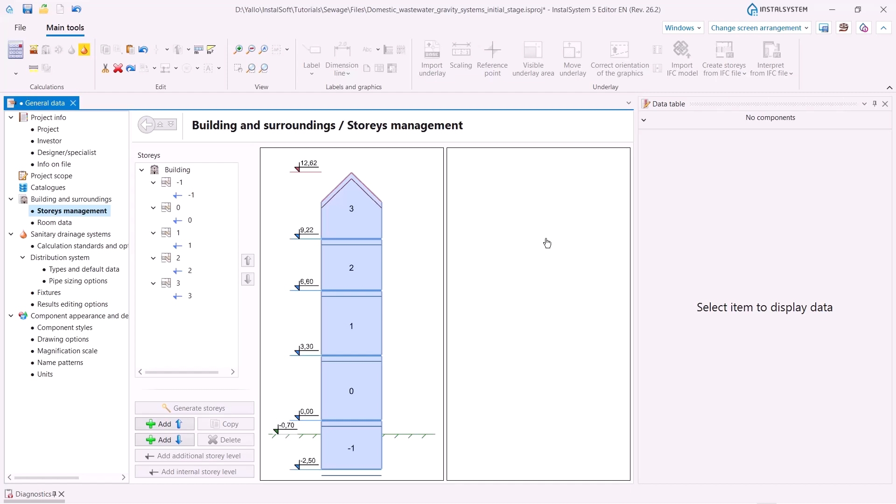First of all, I would like to say that here we have several new features related to building construction. We have the opportunity to create new, additional, and internal story levels. These elements allow us to design installations in complex buildings without any problems and with a high degree of automation.

This has a direct impact on the internal sewage installations because they are laid with a certain gradient in relation to each other and to the floor level, and the creation of additional and internal story levels with their specified elevation allows us to automatically determine the gradient of the pipe runs laid on these levels.

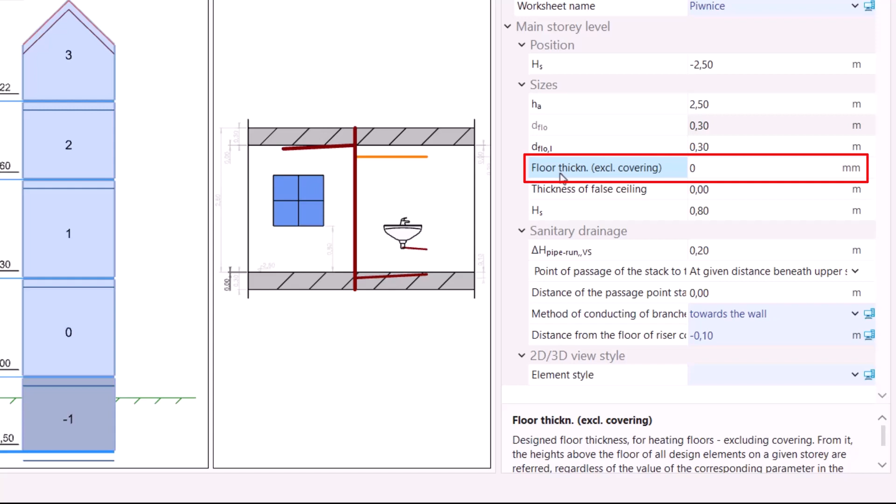Another parameter that has a direct influence on the installation and is often ignored is the floor thickness. This is the thickness of the heating floors. This characteristic is also important for the internal sewage installation and affects the gradient of the pipe runs. So please pay attention to this characteristic.

Now, a very important novelty which recently appeared in our program: the point of passage of the stack to the collector. This is the place of connection of stacks to the sewage network. Unfortunately, this characteristic is often missed by our users, and as a result causes problems with automatic sewage network routing. So don't forget about this. Please pay attention to this value.

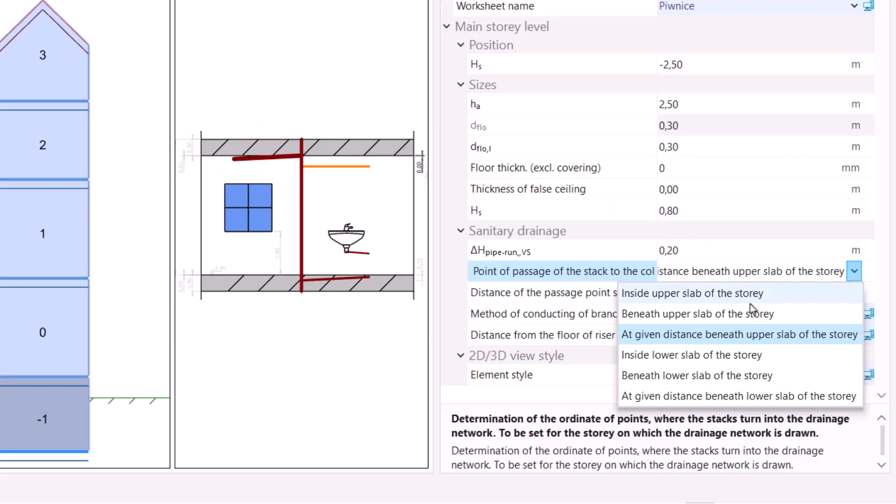Here we have several options to choose from. By default, we have it set at a given distance beneath the upper slab of the story. Please pay attention here. Let's change it to a given distance beneath the lower slab of the story. Now you see how the situation here has changed.

We will also change this value, the distance of the passage point of the stack to the collector. Let it be 0.4, and you see how it has changed.

Once again, I would like to point out that this is one of the critical parameters which has an important impact on the sewage installation in general. So please pay close attention and control it.

Another parameter you should pay attention to is the method of conducting branches. Here we have two options: towards the floor or towards the wall. Today we will try both of them and see what impact this characteristic has on the internal sewage installation.

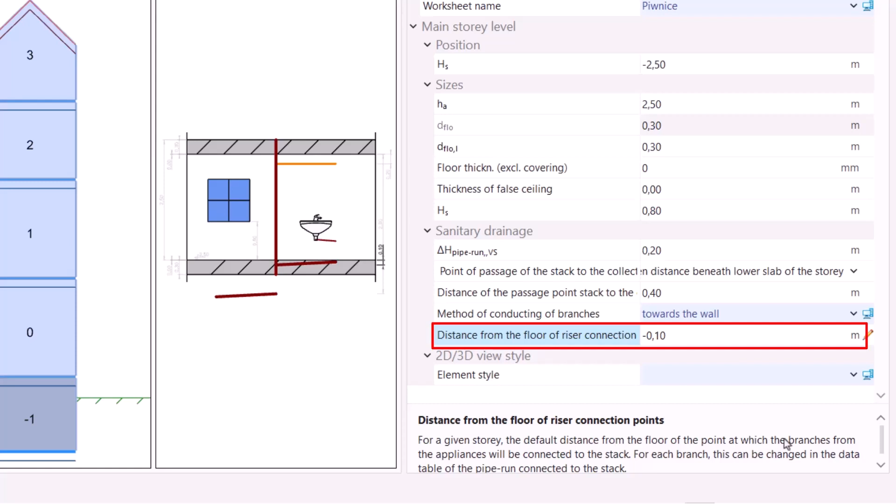One more important parameter we will pay attention to is the distance from the floor to the riser connection point. For a given story, this is the default distance from the floor of the point at which branches from the appliances will be connected to the stack.

Let's change it to 0, and you see how the situation has changed here. In this case, the pipe will be laid with a gradient so that at this point the elevation of the connection will be 0. Please also pay attention that calculations in our program are carried out in relation to the axis of the pipe, so this also has an impact on the layout of the sewage system.

Please note that one of the novelties in our program is that in the label of the element, in the label of the pipe, we have the ability to show data in relation to the axis of the pipe runs, and also in relation to the bottom, taking into account the diameter.

We are moving on to calculations, standards, and options. Here we have two standards to choose from. You know that the program responds differently to diagnostics depending on the chosen standard. There are different settings and restrictions on pipe length, diameters, and so on. Differences in the project standards affect the way systems are filled, ventilation methods, riser connections, and so on. So you can choose between these two.

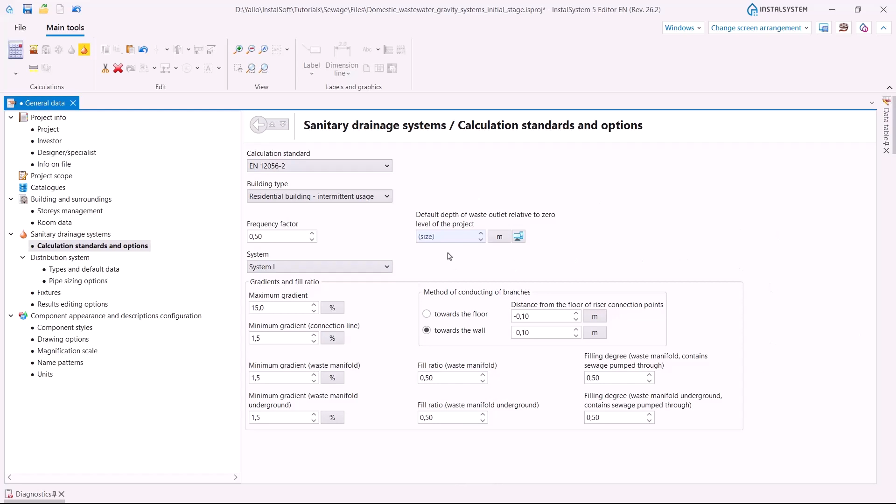Building type, frequency factor, system, and here are general data that apply within the design practice. You can see these values which the program provides by default. You can change them in case of necessity.

Going further, types and default data. Here we can choose the type of pipe for branch, common waste branch, stack, waste collector, underground. We can choose from the offered list default methods of implementation of connection. Default types are the components.

Next, pipe sizing options: you can specify the type of pipe family, and also choose the range of diameters which will be used in the project. Also please pay attention that we can control these parameters: resize diameters, retain user-specified diameters, skip pipe sizing, size pipe fittings, drain ventilation pipe sizing method, and diameters used according to standards or real values.

And fixtures. Here we can specify the default type of fixtures used. Also please pay attention, one more novelty is that we can choose a default frame for the fixtures and use it in our project. Default connection systems. And I think that's all with general data.

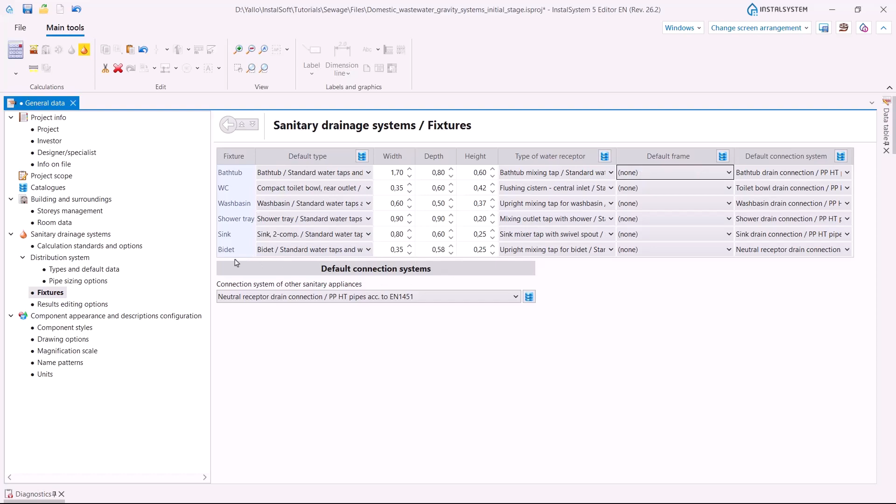And we are back to our working space. Here I have opened two working windows, 2D editor and 3D view. From my point of view, this is a very convenient combination, but you should remember that you can always change the screen arrangement and save it so that it will be suitable for you. Please also note that we have one more novelty: the ability to change story levels visibility. I will show how it works.

Here it is, and if we open the drainage tab, we will see such a picture. As we don't have a drainage system for a while, we see such visible story levels.

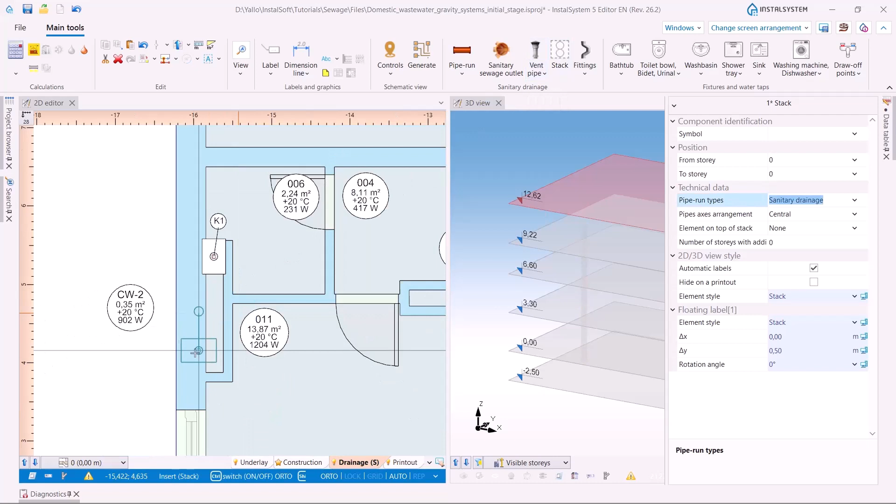We will start from the stack element. Here it is, let's place it here. Turn it. And in the data table, we will indicate its symbol K1, its position from story -1 to story 2, pipe run type sanitary drainage. Let's place another one, also we will turn it. And here in the data table, we will indicate symbol K1A, position from story 2 to story 3, change pipe run type to ventilation, and the element on the top of the vent stack will be a ventilation pipe.

Let's move to another worksheet, to story 2, and for the K1 stack we will change the element on the top of the stack, connect it to another ventilation stack, and indicate it here as K1A. And now you can see that the program has automatically created this pipe to connect the two stacks.

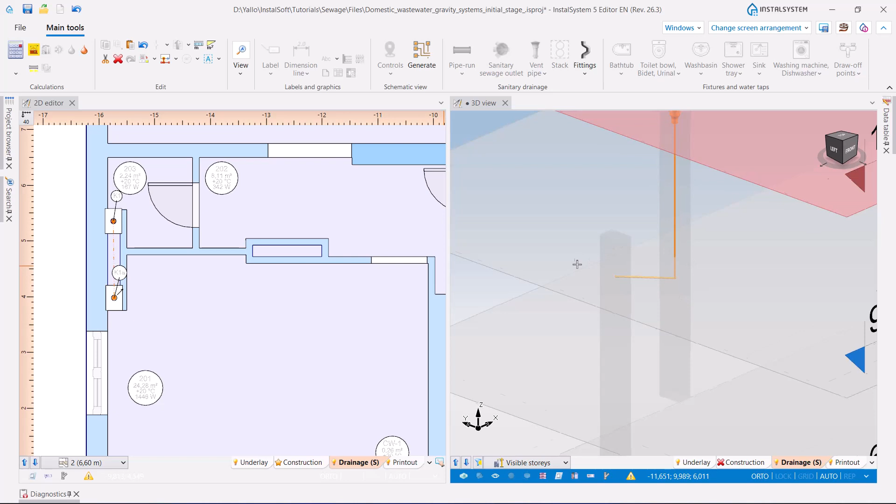This is also one of the novelties in our program. Previously, we had to draw this pipe run manually. Now the program can make it automatically.

And in our project, we will have several variants of the stacks. Let's place one of them here, K2, from story -1 to story 3. The element on the top of the stack will be a ventilation pipe.

The next one will be K3. Let's indicate it in the data table, from story -1 to 3. And this one will also have a ventilation pipe on its top.

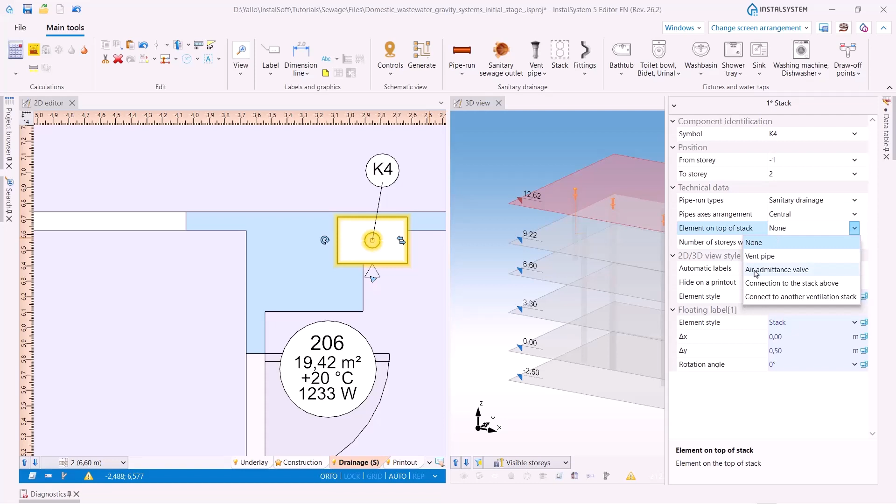And the last one we will place here. And it will be K4, to story 2, and this one will have an admittance valve on its top.

So we can observe already some created elements here on the 3D view. You can see shadows of the stacks, ventilation pipes, and also the admittance valve and part of the ventilation pipe run.

So we have three types of stacks here. The first one is the pair of stacks: one is a sanitary drainage stack, another is a ventilation stack, and the element on the top of the stack is a ventilation pipe. This is the stack with deviation, here it is, you can see. Next, two stacks - these are sanitary drainage stacks with a ventilation pipe on the top. And the last type, the last stack here, is a sanitary drainage stack with an element on top, an air admittance valve.

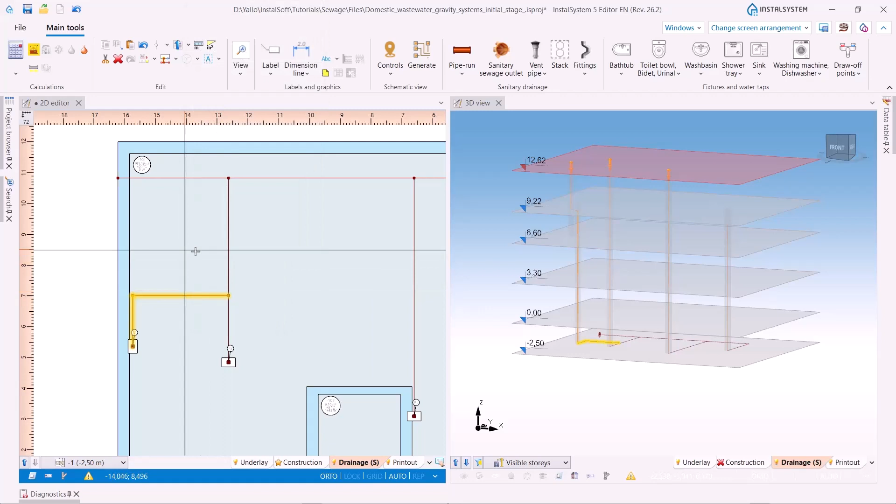And now we will go to the basement and create here the network for our installation. We will place the sanitary sewage outlet on our drawing and we will draw the network using gravity sewage pipe runs, this way, and please pay attention that we will connect our pipe runs squarely - this stack and the next one, and finally the last one. Here it is. So this is our network.

This is the 3D view. Here we have our pipe runs and the installation at this stage.

So we already have created the network on the basement. We already have stacks. And now we will place fixtures. You know that generally the sewage installation is designed in the last turn, after the water supply installation has already been designed, and therefore in most cases we already have fixtures placed on the drawing. But now I would like to show you the complete process of creating a sanitary sewage installation in InstalSystem 5, and that is why I will show you how to place fixtures right now.

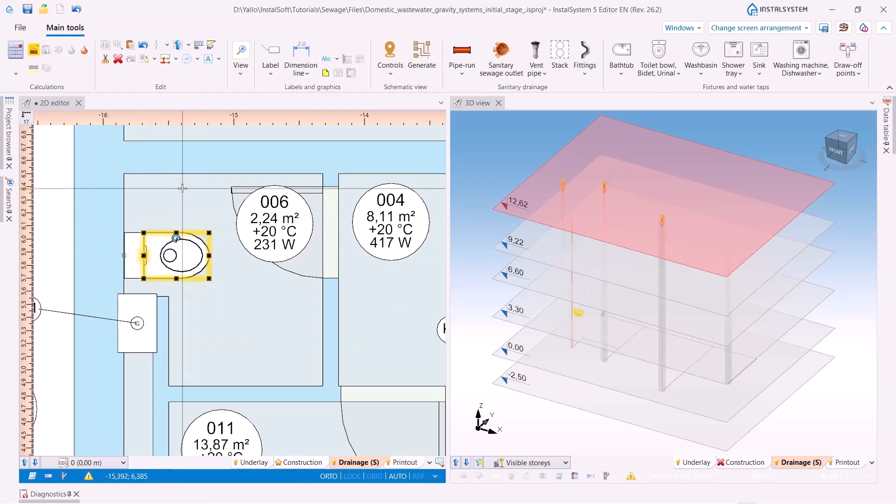The icons related to this process are located here. Let's choose toilet bowl and place it on our drawing here. And let's place also a wash basin, here it is. And now please pay attention to one more novelty which can be very useful, here it is - copy with the base point.

Let's choose the components and indicate a base point, for example, this one.

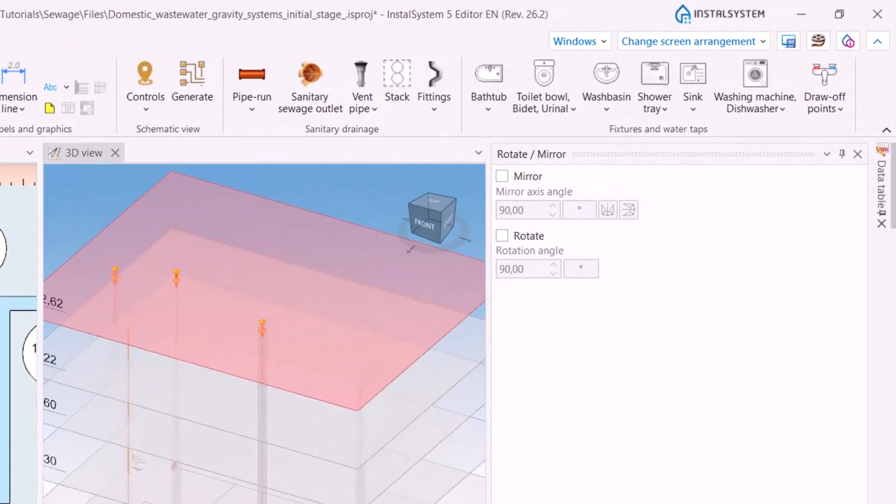Now when we place objects on the drawing, you see that we already have a base point. Also please pay attention that now we provide the opportunity to make a mirror copy and set the mirror axis angle here, and to rotate the objects with the appropriate rotation angle.

So we paste copied objects. Let's improve the position of this wash basin. This function is very useful, it can speed up the process. Instead of inserting fixtures one by one, you can just copy several of them, indicate one base point, and insert fixtures in necessary places.

And we can already observe placed fixtures here on 3D. That's what we can see now on 3D view.

Let's continue, so let's move to the kitchen. It is here, we will place a sink. Please note that we can always change the type of any element here in the table. Let's choose this one.

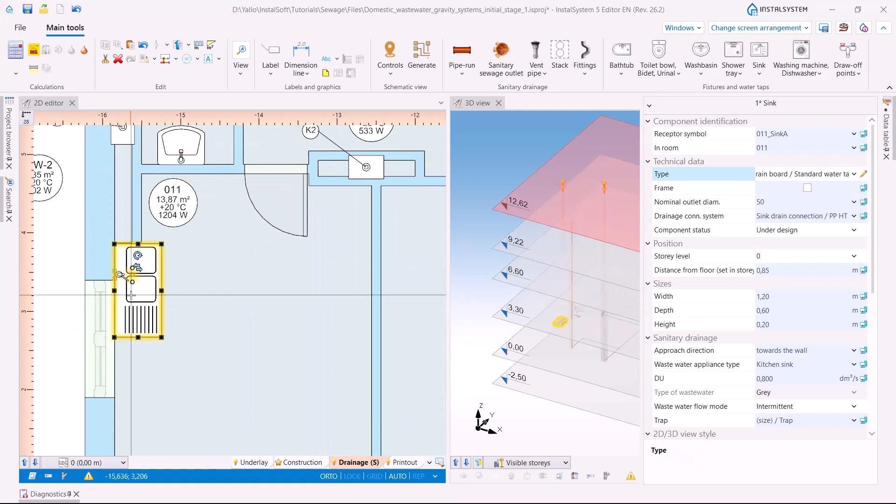Let's improve its location. And also we will place a dishwasher.

For example, here. We have one more kitchen on the opposite side of this building. It is here. And we can copy also these two elements.

We can use the function copy, or we can use the key combination Control C and then Control V to paste elements. Let's use these functions, which you already know. We will rotate the copied elements and place it here on this side of the kitchen.

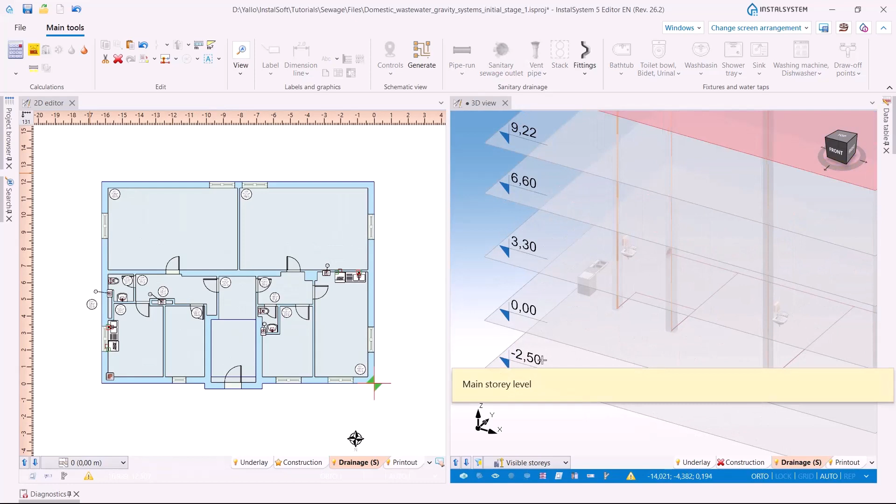As you can see, we offer several options for copying elements in order to make the system creation process as convenient and intuitive as possible. That's how it looks on 3D view.

And we are moving further. Our next step will be placing sanitary appliances in the bathrooms. So it is here, we will place a shower tray here.

We will place a wash basin, and also a washing machine here.

And we can choose all these elements and use the function copy with a base point once again. Choose base point, and here we also have a bathroom. We will place it here.

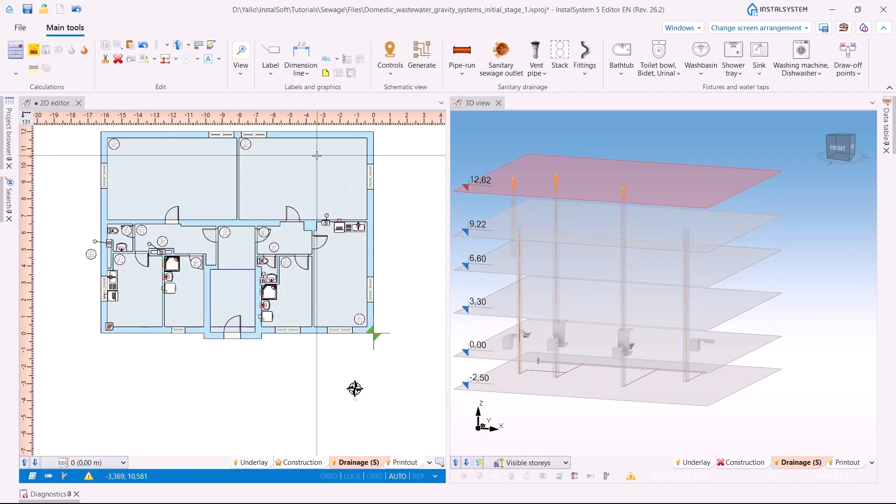So now we have all fixtures on our drawing, and now we will make connections of sanitary appliances to the stacks. We will use this function, gravity sewage pipe run, and connect each fixture to the stack.

This one, this one, this one, toilet bowl.

We can control our actions on 3D view. Here we have such pictures, such icons. The next step will be the bathroom.

We will connect these sanitary appliances with the stack.

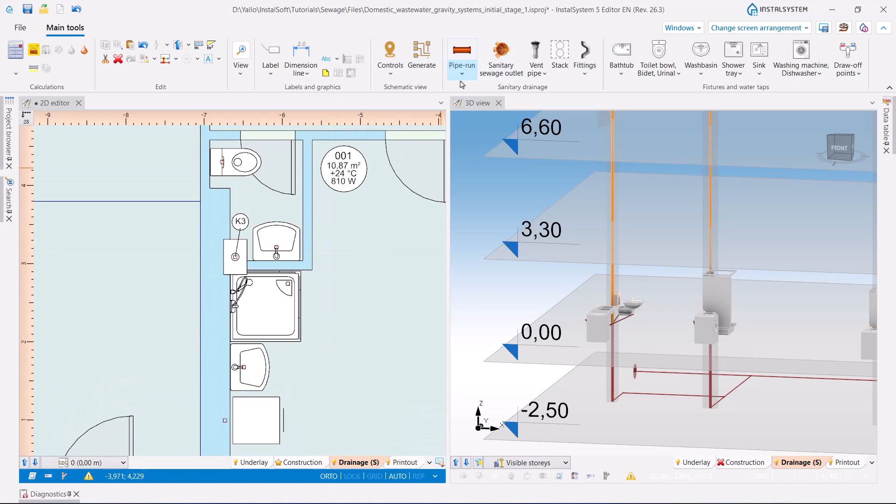Next bathroom. And this wash basin. This one and this one.

And the last one will be the kitchen here. We will connect here the dishwasher and this sink.

And now we can run our first calculation. Let's do it. Here's the icon. You can see that the icon is yellow, not red. That means we didn't have any errors in our project and we can continue.

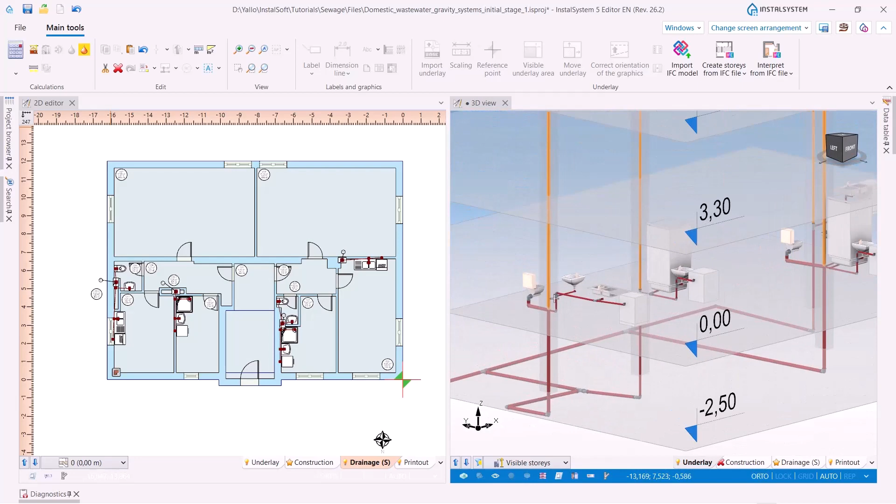So we can observe our installation on 3D view. We can already see the nodes. Please pay attention that we can change the visibility of nodes here in the general data window, drawing options, visualization of sewage fittings.

And here we also provide the opportunity to show in 3D view fittings for incorrectly sized nodes. One more novelty we provide to our users is the possibility to change installation elements visibility right here in the 3D view window in our working space.

So let's see our 3D view. Here it is, we have gray color for correctly sized nodes, and this light color for incorrectly sized nodes. And sure, we need to improve this.

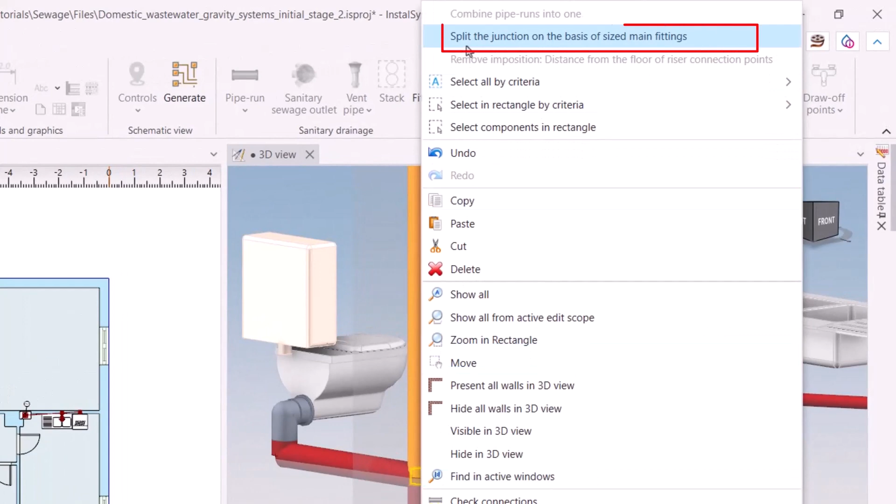One more great novelty in our program is that now it can be done easily with the use of this function: split the junction on the basis of sized main fittings. We just need to choose it and run calculations once again.

And now you can see that the program has automatically selected and sized fittings for these nodes. Please pay attention to one more very important aspect.

This first connection to the stack, this first T, is made automatically by the program based on the default data that we put here in the general data window, in the storey management: this elevation, distance from the floor of the riser connection points. This is a very important value, very important data that we should control because it has great influence on the calculation of the installation in general. So please pay attention here, and we will be back to our working space.

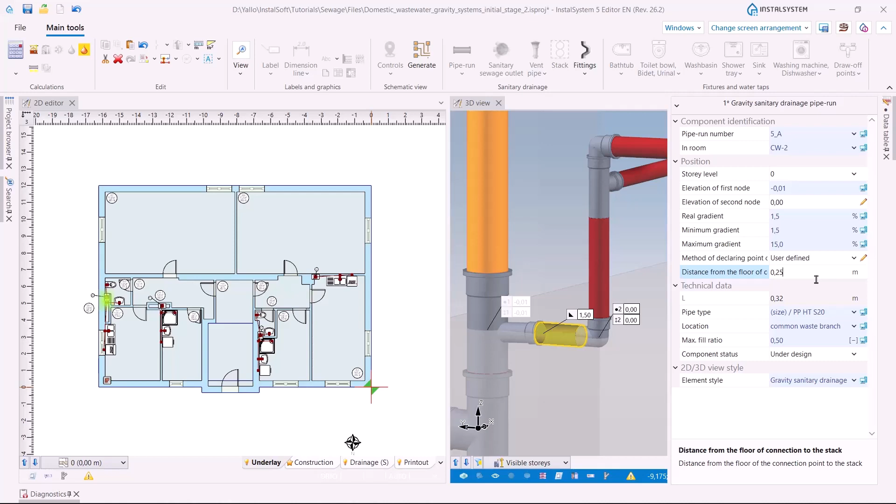Please remember that in the data table we can change this automatically calculated elevation of the connection, for example to this value for each separate pipe run. Let it be 0.25.

Okay, and we will run calculations. And now you can see that this T is now located on the other elevation. The same we will do for this connection.

Let it be 0, of course it depends on the needs of each particular project. For our project, as an example, we will use these values.

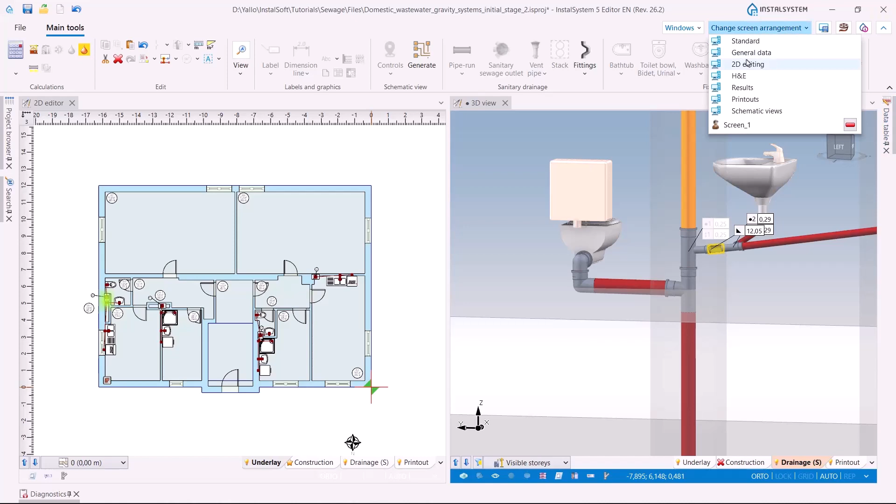Now you can see that the connection point has 0 elevation, and this one is also calculated in accordance with the data we put in the data table. If we have similar connections for each step in our project, we can put this data directly in the general data window, as I showed you before. In the storey management, we will just change this value in accordance with the needs of the particular project.

Our next step is to improve the rest of the installation. I will uncheck the story levels visibility, and also I would like to show you one more important aspect.

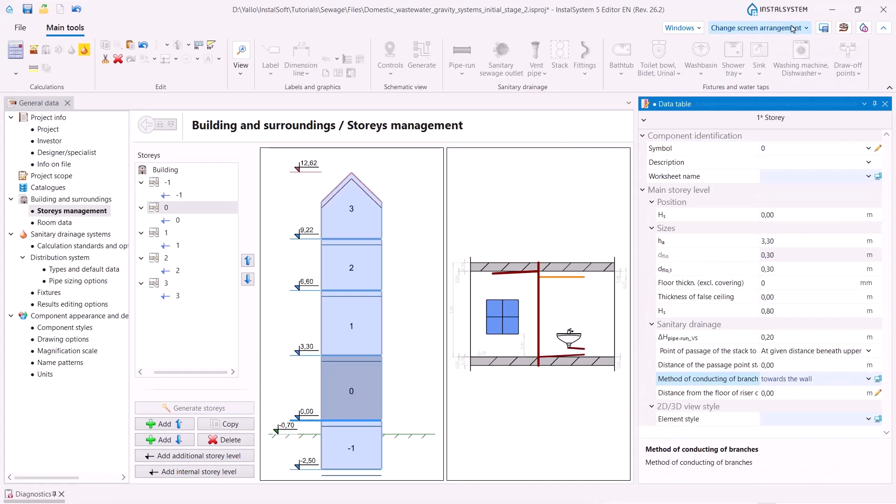This data was taken by the program from the general data. You should remember we put it here, method of conducting of branches towards the wall. We will change it for this washbasin here in the data table.

We will choose another variant, towards the floor. And we will do the same for the washing machine, towards the floor.

By the way, you can change all the appliances of the same type using the project browser. Here we need to find washing machine, and we will just use this function, select all. In our case we have 2 appliances of this type, and here we will change the type for both of them. As we have already done this, we will now see the effect.

We will run calculations once again, and you see how the connection has been changed.

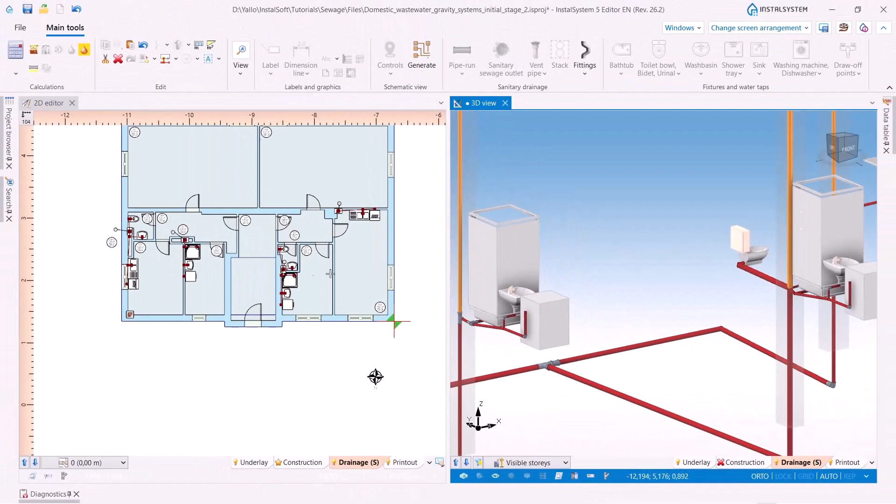I would also like to change the position of the shower trays. I will choose this one, and just using these pointers, I will turn it for this one, and also this one.

So we have finished with the situation for the connections to the K1 stack, and now we are moving here to the K2.

Let's turn it to 3D view. I would like to turn your attention to the fact that we often have a warning related to this connection - here it is, that gradient of pipe run is less than minimum value.

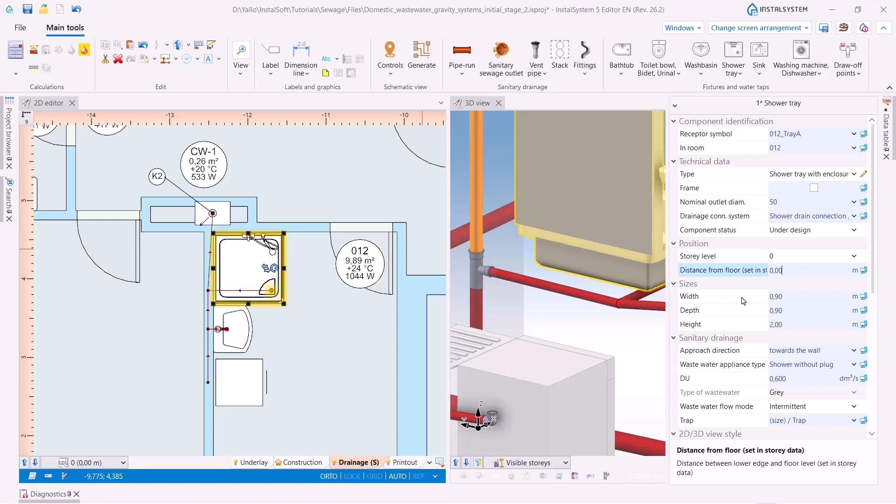This happens because the distance from the floor to these appliances is 0. The program calculates the real gradient of the pipe run in accordance with the elevations of sanitary appliances that we put in general data, and of course with the maximum and minimum gradient of the pipe runs.

Please pay attention here, that for this section, for this pipe run, real gradient is 15. Here is the value. If we change this value, for example, to this, let it be 8...

...and calculate the project, we will see that the program automatically calculated real gradients for each pipe run, and we see that all nodes, all fittings for this connection are correctly sized.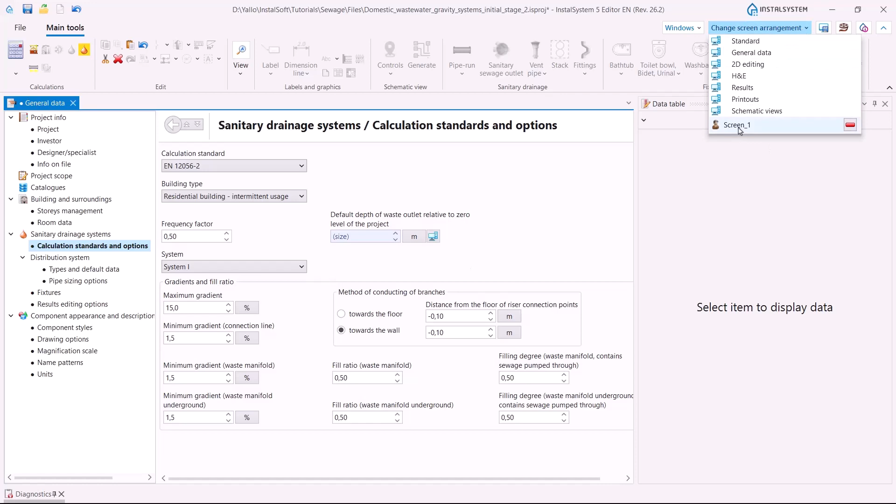You should remember that maximum gradient is one of the most important criteria for the layout of the sewage installation. We put it here in the general data window, in the calculations, standards, and options - here it is, and we can control it, we can change it depending on the needs of the installation for each particular building. And we are moving on to the K3 stack.

Here it is. And here, as you can see, we have such an incorrectly sized node, and we have 1, 2, 3, 4, 5 connections. I would like to make for this connection to the wash basin...

...the elevation distance from the floor connection to the stack, as we made for the previous case. Let's calculate it. And you see that we have one sized fitting already.

And for this node, we will use this wonderful grade function, our novelty. Calculate. And you see that the program has automatically selected fittings and placed them on the stack at different elevations.

Actually, you should know that all fittings in the catalogs of InstalSystem 5 correspond to their real dimensions, and therefore the program automatically placed it accordingly. So here on 3D view, we can see them as they will be placed on the pipe runs in reality.

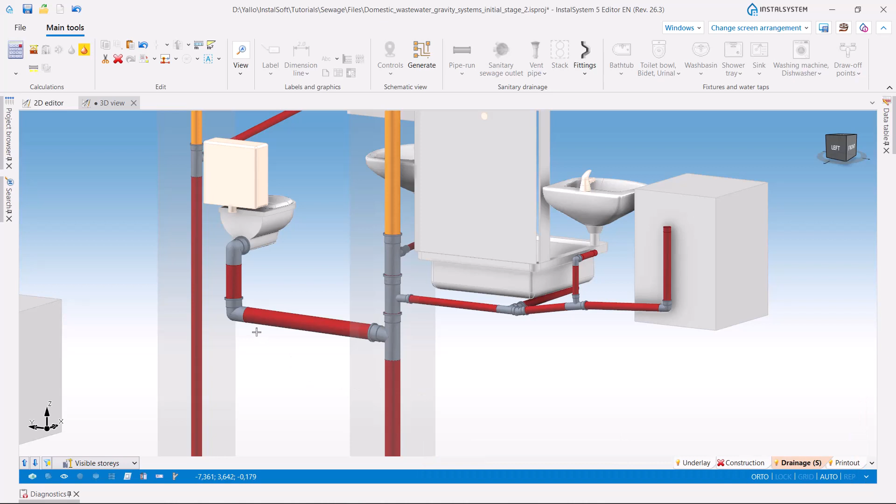So we improved all the fittings here for this case and corrected the real gradients of the pipe runs. Now we'll turn to one common case that we often meet in the project: this unnecessary vertical section.

As we can see, the value of the real gradient for this pipe run is 1.5%. We can find this value in the data table, real gradient, here it is. We can try to set different variants for the real gradient and see the result, but we can do much easier: we can correct the value of the maximum gradient.

to 999% and calculate the project and enjoy the excellent outcome. The value of the real gradient for this pipe run now is 36.25. Here it is in the data table, real gradient. Minimum gradient is 1.5% and maximum gradient is 999%.

And we have one more place to be corrected, this is it, K4 stack. And you see that here we have one more problematic place, one more incorrectly sized. Now let's check on its visibility. You see that it has light color.

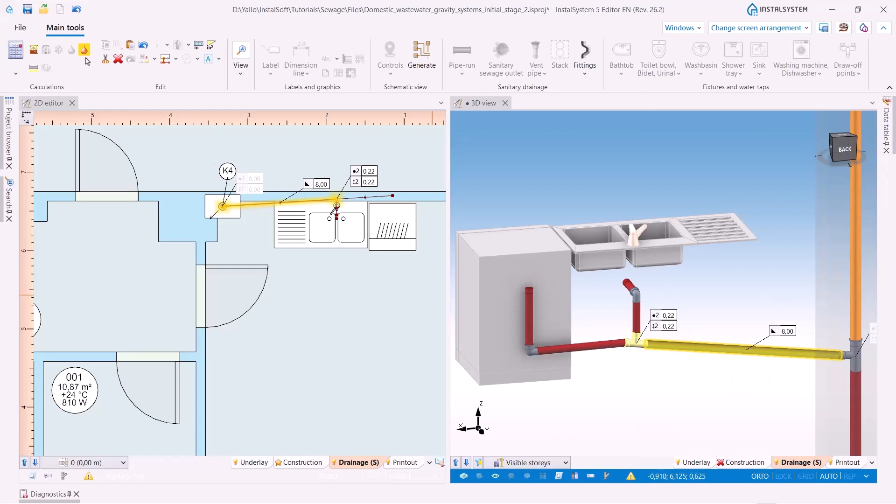So you can see that the color of our fitting is gray, and here in this place everything is okay as well. And we are moving forward.

So we improved the installation here on the 0 level, and now we can copy this part of the installation to the next stories, as we have several of them here. For these purposes, we will use the function copy selected elements to the multiply stories.

We will choose necessary elements, and here we will indicate from story 1 to story 2. Now we can see the effect of this function, and also here on 3D view.

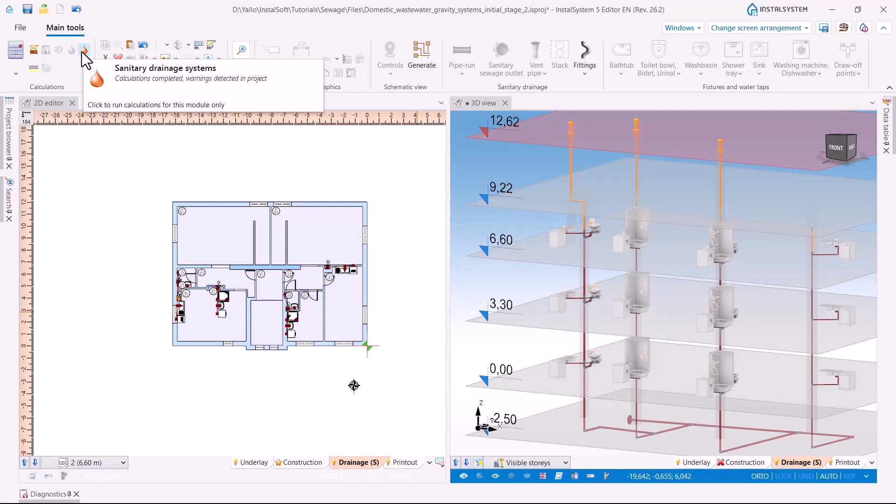Now we need to run calculations once again, and I would like to pay attention to this warning: fitting connecting pipe runs not sized, required angle 79 degrees. We see this connection here. What we need to do in such situation: we will choose this stack and change this offset angle to 79.

Run calculations once again, and you see that everything is okay here, and by this way we can correct all rest warnings.

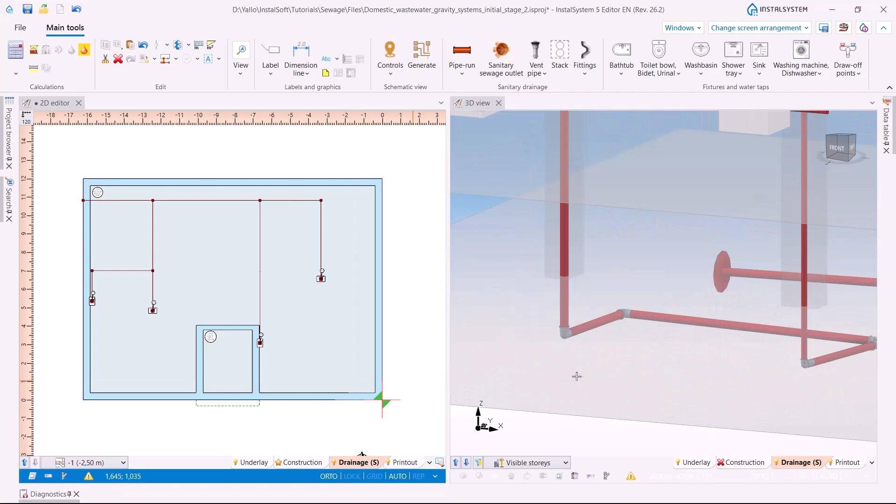And we go down to the basement, and here we will improve the network. The first thing we will do, we will correct this connection of the stack to the network.

So now we have such a variant, and to make this transition more seamless, we will do the following. We will go to the general data, and here in the types and default data, we will choose another method of implementation of transition from the stack to the waste manifold. We will select this one.

Let's go back and let's run calculations. You see how these connections have been changed. It is very important in the sewage installations to make such transitions more seamless, and you see that it can be done very easily for each stack.

And also for these places, such seamless junctions can be referred as chamfers. And if to continue the topic about chamfering, we will pay our attention to these straight tees.

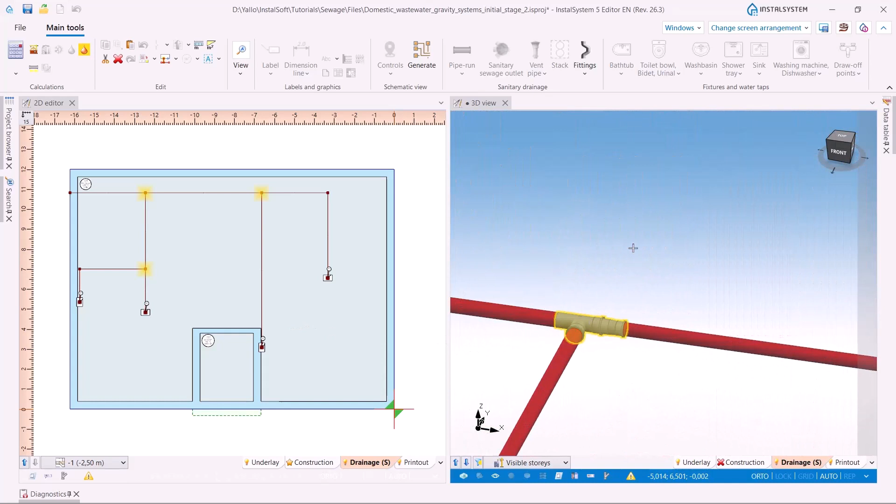We also can change them easily with the use of this fitting. I will turn the view to make these tees more visible. We run calculations once again, and now you can see how these tees are represented on the 3D view.

And on 2D, we will turn on the visibility of nodes to simplified here. And on the printout, you can see that all the junctions are perfect.

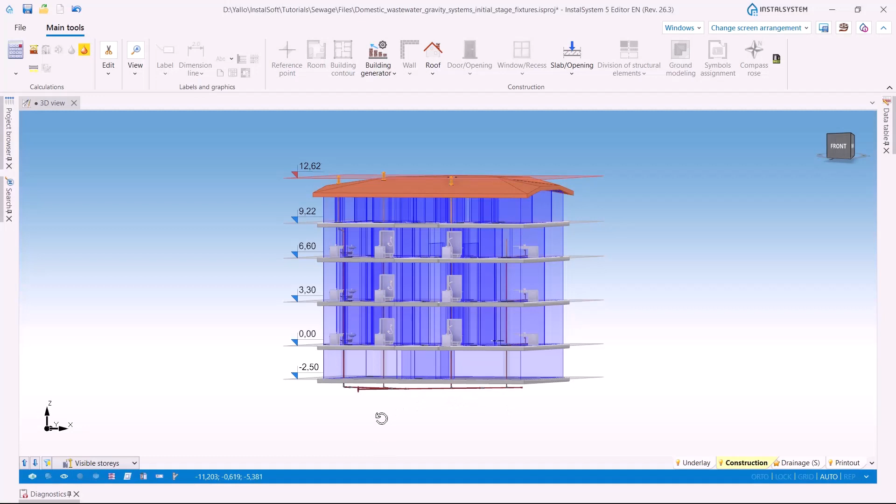And continuing the topic of the network, I would like to show you on 3D view how the change of the parameter, which we have indicated as one of the most important, impacts on the layout of the network on the basement.

So here it is, let's go back to the general data. Here you should remember this setting point of passage of the stack to the collector. We have indicated it as at a given distance beneath lower slab of the story, and also indicated the value of the distance. Let's change it to this one: beneath upper slab of the story.

Go back to the 3D view and calculate our project. So you see where the network is located now.

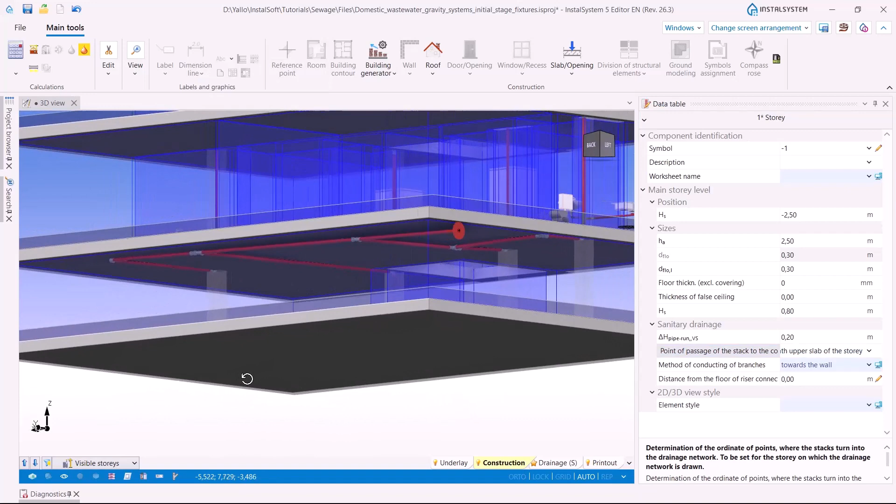And here in this scope, I would like to remind you about one important aspect of the calculations of the network in our program: that all points of the network, all points of the installation in general, are calculated taking into account the elevation of the axes of the pipelines.

So that's how the network is looking now, and we see that some pipes are located partly inside the slab. This is because the program automatically calculates the connection points and the elevation of the pipe runs based on the axis. It doesn't take into account the diameters of the pipelines.

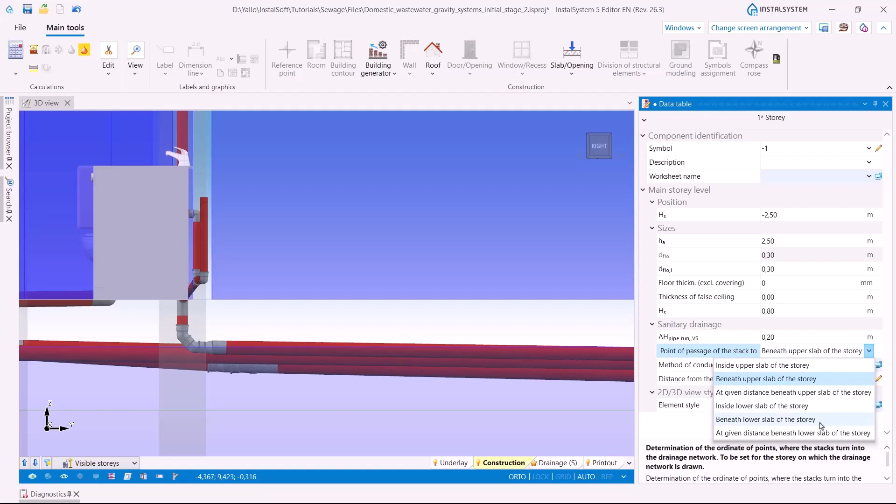I unchecked the visibility of the slab, and you see that the connection is made directly beneath upper slab in relation to the axis of this pipe run. So let's change it back to our previous meaning. Let's recalculate the project and we return to our original state.

And now I would like to show you the possibilities the program offers to our users in terms of graphic design of the product.

Let's open the search window and add a new search. We will call it waste branch up to diameter 50. Here we will choose pipe run, technical data, location, waste branch, diameter 50.

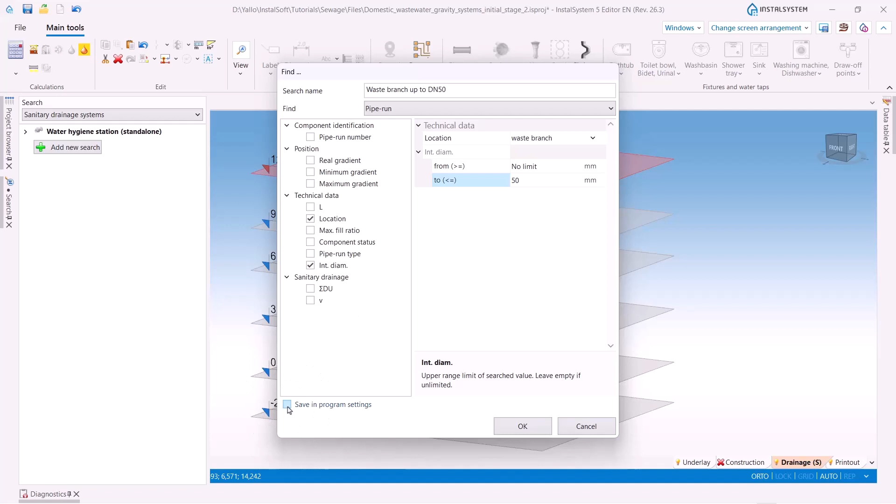We can save this new search in the program settings. And now let's find all pipe runs with these parameters. Select all, and you see all these pipe runs are highlighted in yellow.

Here in the data table, we will change the element style to waste branch up to diameter 50, and you see that these branches became white. We changed the appearance of these sections because they will be polyethylene pipes.

This element style was created here in the general data window, in component styles, sanitary drainage, pipe run. We just need to add a new row, set the title, and add the properties of the element appearance. As you can see in InstalSystem 5, you can design your project according to almost any needs and wishes, and at the same time it doesn't require serious effort or time.

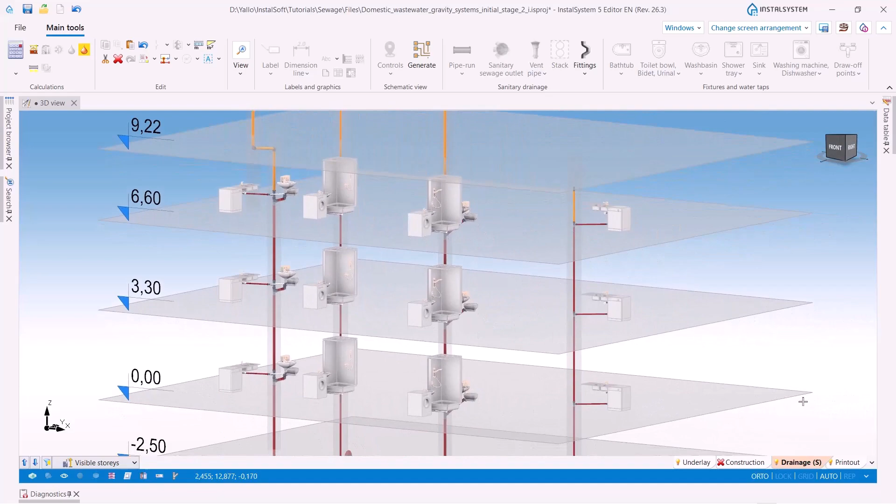I would like to show you some specifics on how to design various elements of the installation. We will start from the drain. This element is often used in the project, and we will place it here in the basement and connect it with our installation. So you can see it.

As you have already realized, the level of automation of the design process in the program is very high. But at the same time, when necessary, we can perform manual adjustments quite simply and with a high degree of efficiency. On this example, it will be seen very well.

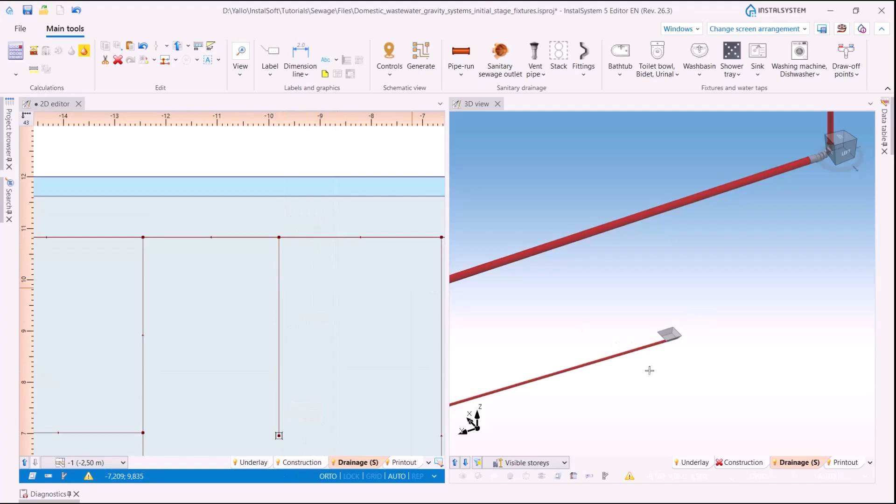So we have made the connection. Let's calculate the project. And you see how the program made the automatic routing of this pipe run. But what should we do if we want to make a sloping section here, for example, and thus reduce the number of fittings for connection? We do not need to remove unnecessary sections from our point of view and try to make the connection manually — the program will do it automatically.

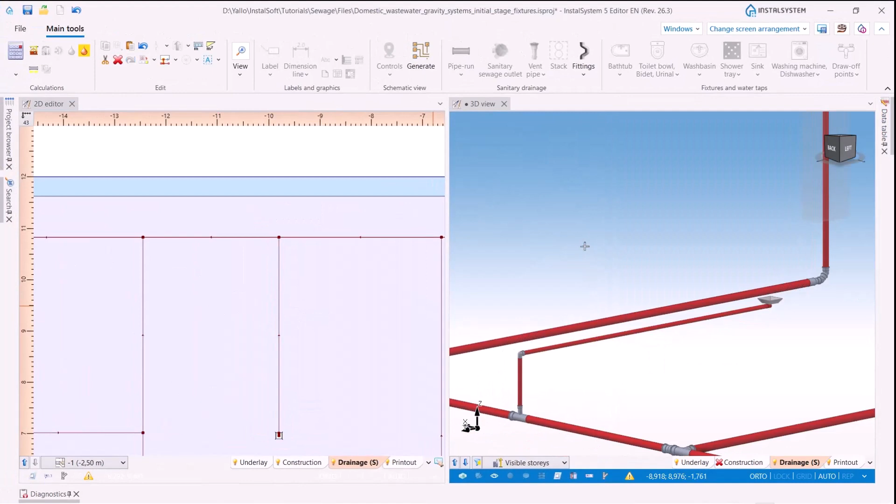We only need to perform one simple step. Here, at this point, maximum gradient, we will indicate this value: maximum gradient 999. Let's run calculations. And you see the effect of this manipulation: we have such a sloping pipe run with only two connection points here and here, directly to the drain.

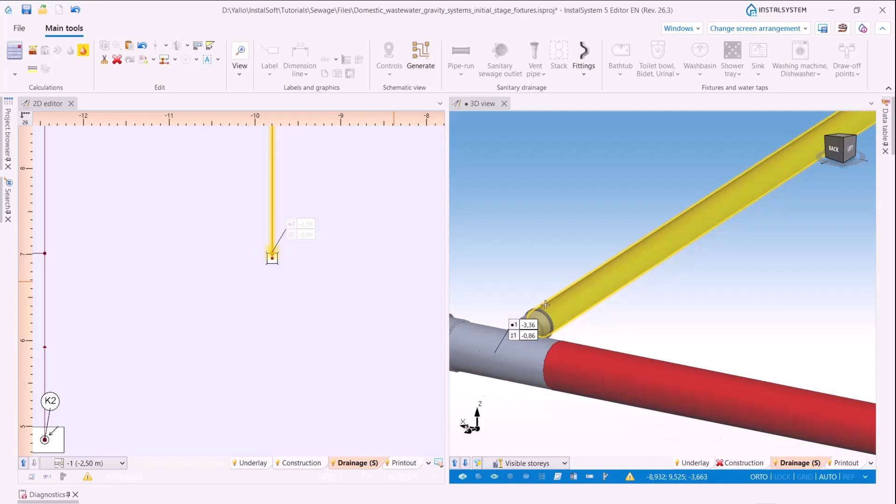The second variant, if you would like to make a vertical section here, can also be realized very simply and executed automatically by the program. We just need to insert a dividing point — let it be here — and specify the elevation of this point, taking into account the elevation of this one. It is minus 0.86, so here we will indicate minus 0.7.

And we calculate the project once again. You can see that the program automatically made this connection for us, and we do not need to draw any pipelines or delete sections to make such a connection.

Here we need to pay close attention to one more important aspect: the location of the piping section. Here we have waste branch, but this one is waste manifold. This one, and also this one, and all the rest of the pipe sections located here in the basement, belong to waste manifold.

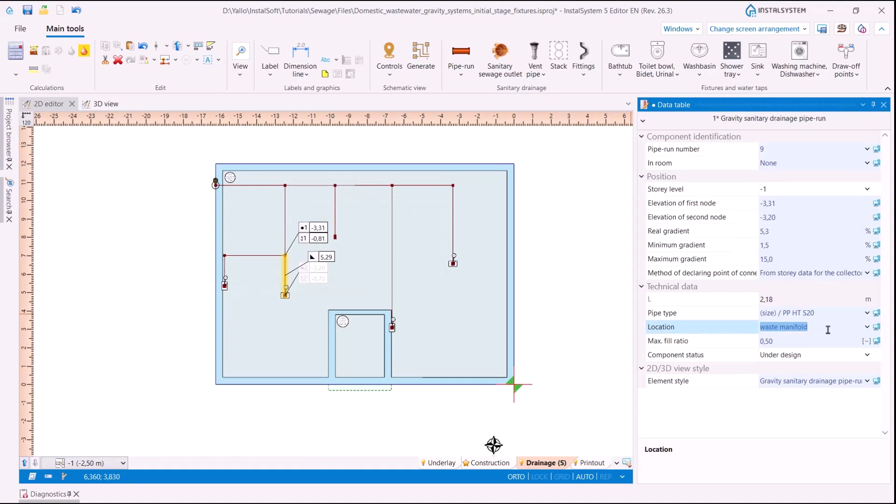It is very important to pay attention to this assignment, because based on this characteristic, the program assigns data from the general data which are set by default. That is why there can be some inconsistencies in the product. So it's important to pay attention to what type a given section belongs to. If the program automatically assigns the wrong type — which is possible, for example, when there is a large number of fixtures and the network on the same floor — we can change this location manually, and we should do this to avoid diagnostic messages and even errors.

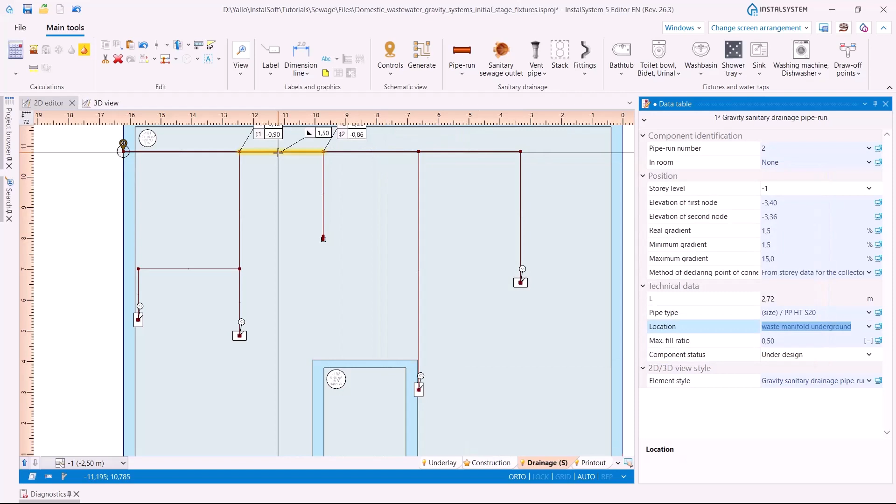Also, please pay attention: if we change the location of this section to waste manifold underground and run calculations, all subsequent sections will be changed accordingly.

So here is the results window. Here we can find general results for sanitary drainage: number of sewage outflows, sewage sources, number of drainage pipe runs, sanitary sewage outlets, outflow data, nature of wastewater, outflow elevation, sanitary drainage and ventilation pipe runs, and the table with a list of pipe runs.

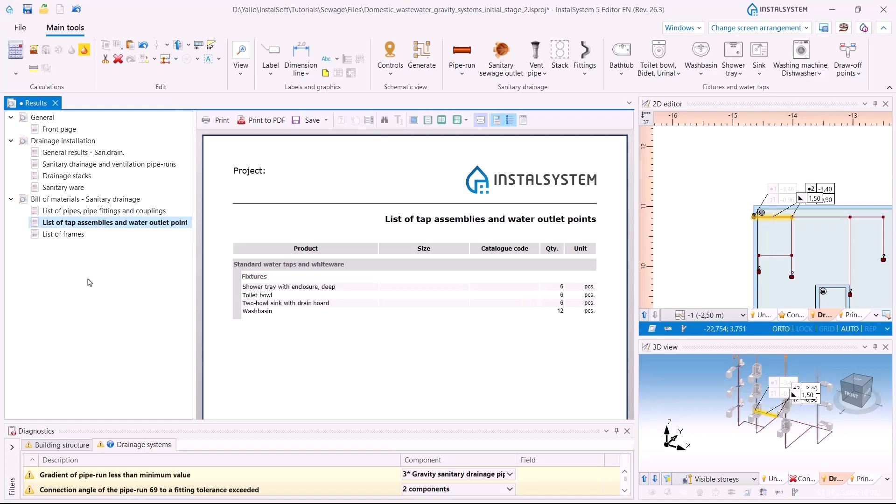We can find any of them on the 2D editor and on 3D view: drainage stacks, sanitary ware, and also bill of materials, list of pipes, pipe fittings and couplings, list of tap assemblies and water outlet points, and also the list of frames if they are in our project.

And we are moving to the end of our project. One of the last phases will be generating the schematic view.

Let's go to the basement and place here the starting point. This is one of the most important elements of the schematic view.

The next step will be using this function, generate worksheets with schematic views. Let's run it and discover the result. Here it is, here is the schematic view.

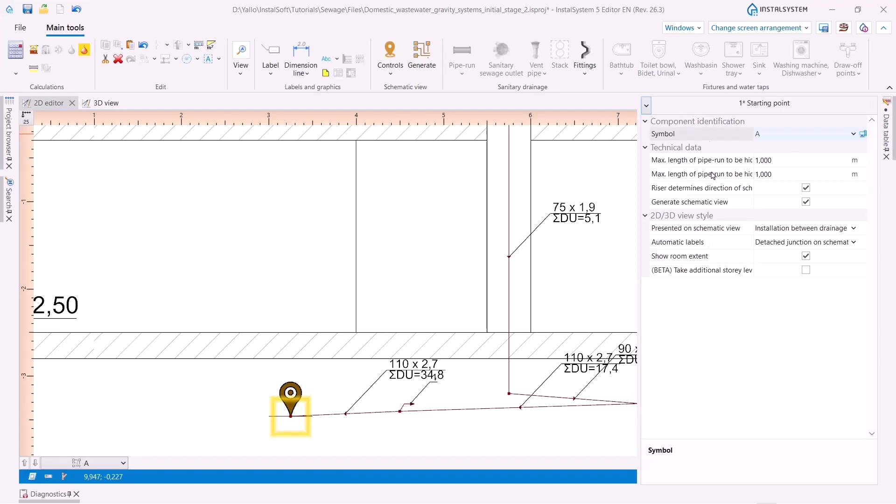Let's observe what possibilities the starting point provides. It is used to adjust the properties and visibility of the elements of the schematic view.

As you can see, we can control the maximum length of the pipe runs to be heeded, the riser which determines the direction of the schematic view generation, and here in this section we can choose which elements of the schematic view will be presented: labels, visibility of room areas, and also additional story levels.

This is one of the novelties in our program, one of the great functions which can be used in the project, and we will also have a separate webinar on this subject.

So you can see how fast the process of generating the schematic view is. It is a rather wide topic, and we will have a separate webinar where we will discuss all the possibilities the program provides in this sphere.

The final step will be exporting our drawings to DWG, to IFC, and printing. We will do this here on this working space in the printout.

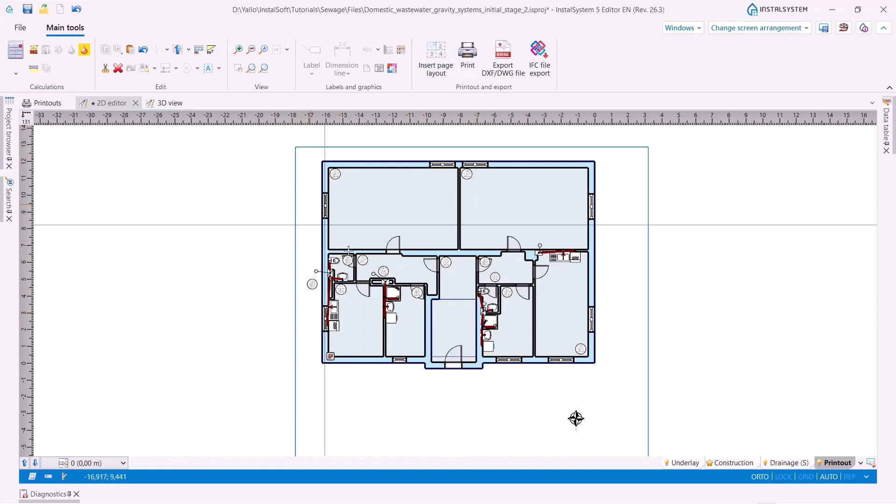So first of all, we will insert the page layout. Here in the data table we will choose the necessary format of the paper, its orientation, scale, and other data. Then we will put the drawing chart. The type of drawing chart we can change here in the data table.

And print our drawing. Here it is.

Export to DWG file is here. We can control the properties of the exporting, choose the layers of the elements, the worksheets which will be exported, and also choose the file to which the worksheets will be exported. Here we can choose the place, the folder where the export will be made, and then execute. I think everything is clear here.

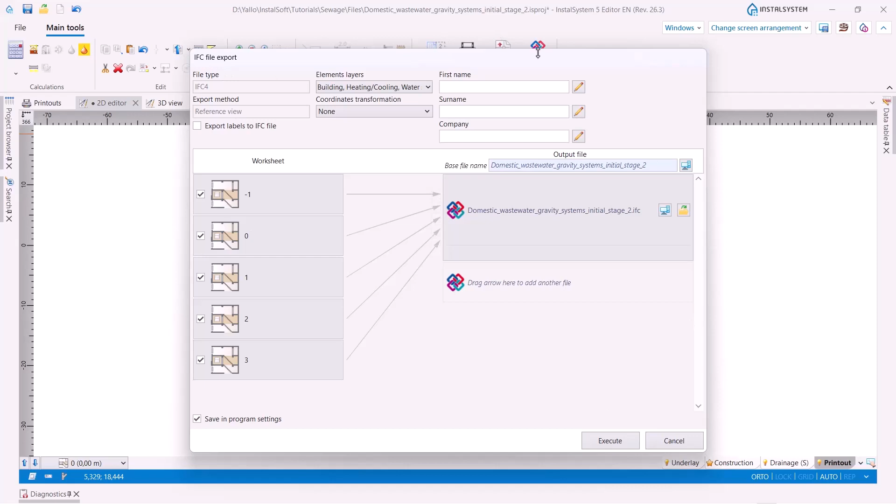IFC export. Here is the table for executing the export. We can also control the settings of exporting. So our project is ready.

Now we will observe different methods of implementation of nodes on several cases. And here is the first case. Here we have two toilet bowls which are connected to one stack. It is a rather common case.

For this node, we will check this function, split the junction on the basis of sized fittings, and run calculations. So you see that the program automatically selected and placed these two tees. This selection is determined based on the data that we put in the general data.

Here, method of implementation of pipe runs to stack connection. We have all by default, but we can choose any particular method from this list. And in this case, the program will select all nodes in the project based on this chosen method.

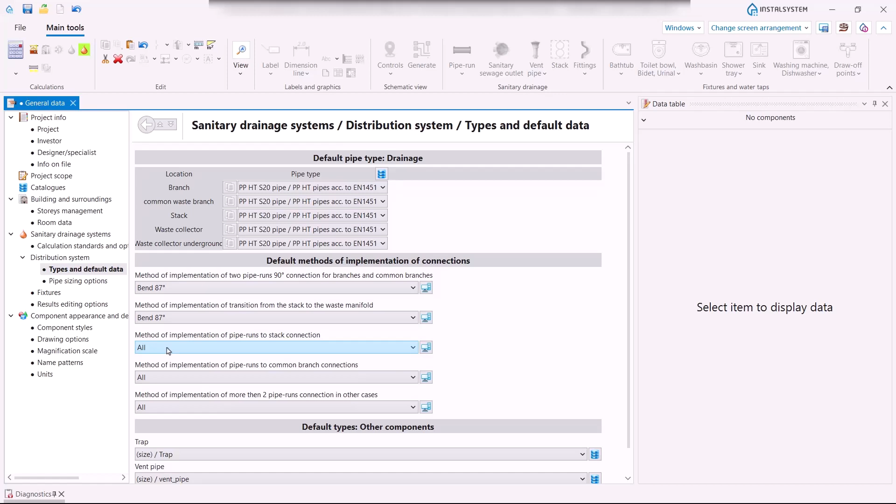And if we would like to change the method of implementation for each particular node, for example for this one, we will do it here in the data table, method of node implementation, and choose from this list, for example branch 45, and run calculations.

So you can see how the situation here has changed. Let's do the same for this one. Calculate the project. So you see these two tees.

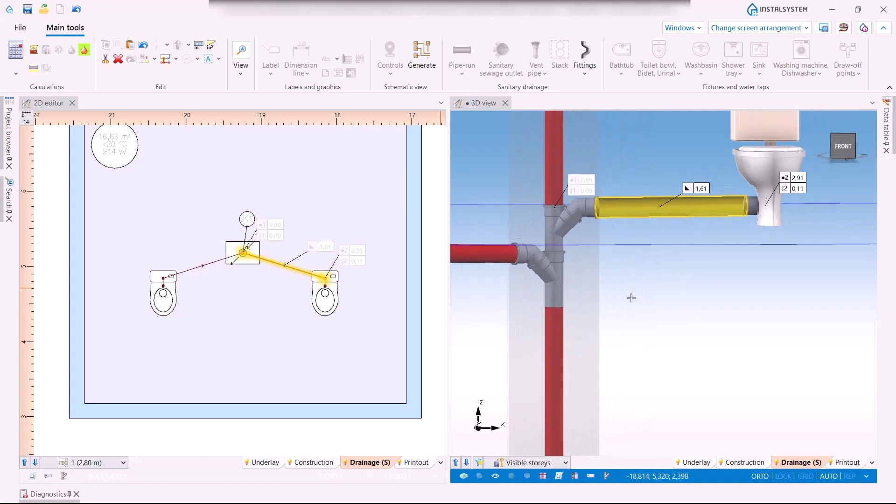The elevation of the upper connection is taken by the program from the data we put in the general data, specified in the data table. We can also change this value if necessary, and the program will locate the upper node and place it depending on this location. So you can see we can easily control and change the type of each fitting, each connection, and its elevation.

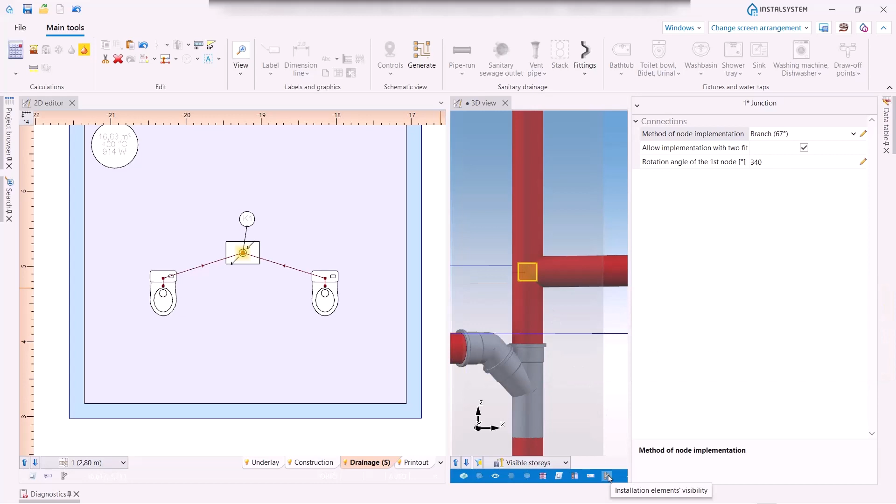You should know that when selecting a fitting, the program carefully checks whether the fitting is suitable for a given connection. For example, for this one, we will change the type, maybe for this branch 67. Let's calculate, and you see that the program cannot implement it in this situation. We can check the visibility of the incorrectly sized node, and you see that the program cannot select any node for this case.

Let's return this branch back. Everything is okay here now. And also for this connection, for the lower connection,

I would like to delete this unnecessary vertical section. You should remember that for this situation, we will change the value of maximum gradient for this one, 999, and recalculate the product once again. So you see that now everything is correct, everything is suitable.

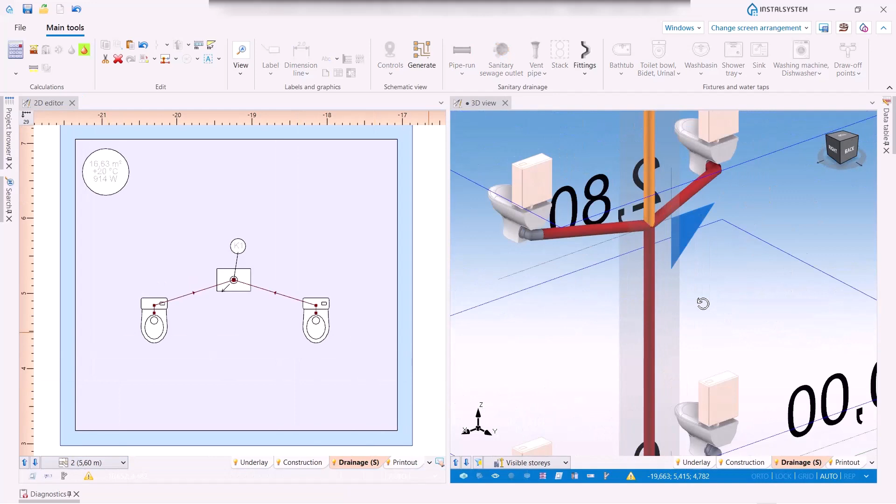And we move to the next story, to the upper level. Here we have the same situation: two toilet bowls and one connection to the stack. But we will realize this connection in a different way here.

So in the data table, we will uncheck this function, allow implementation with two fittings. It will be our first step, and let's calculate the product. I would like to show the fittings in 3D view once again, and you see that the program has selected the fitting here, but it can't be realized for this connection.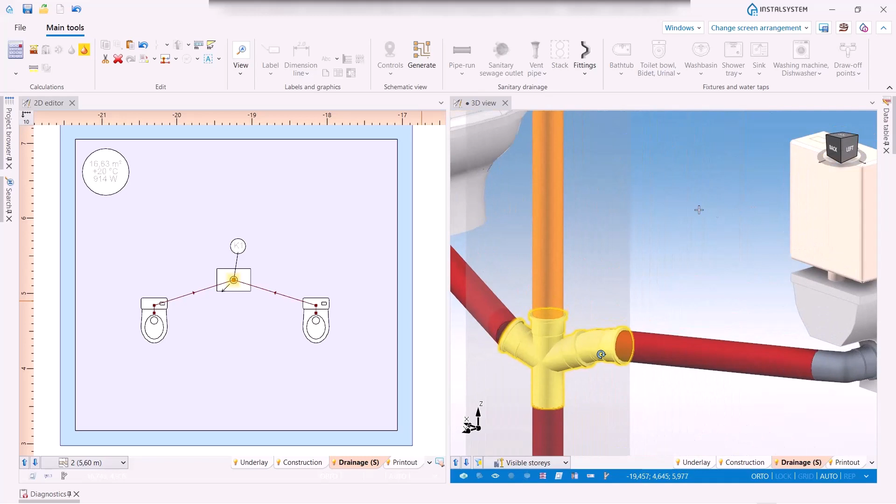Let's change the type to double branch, branch 87. Recalculate the project, and you see that this fitting also can be selected but can't be realized in this place because of some mismatches of these connecting pipes.

We can change the situation with the value of rotation angle on the first node of the nodes that we have here. We can try to change this value and calculate the project. So you see that the program responded and matched the correct fitting here.

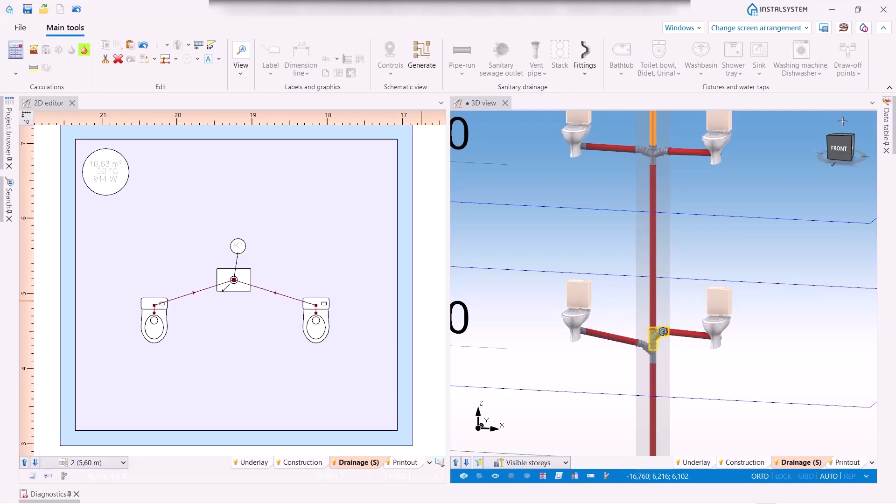To summarize, we should remember that for such type of connection, we can change the method of node implementation, choosing from the offered list. We can realize such connection with the use of two fittings, and in this case the function 'allow implementation with two fittings' should be enabled. We can realize such connections with the use of one fitting, and in this case this function should be inactive.

We can improve such connections in situations when the program shows us that this fitting can't be realized for this connection. We can change the value of rotation angle and monitor the situation changes. And we can also change the value of the gradient for each connecting pipe run.

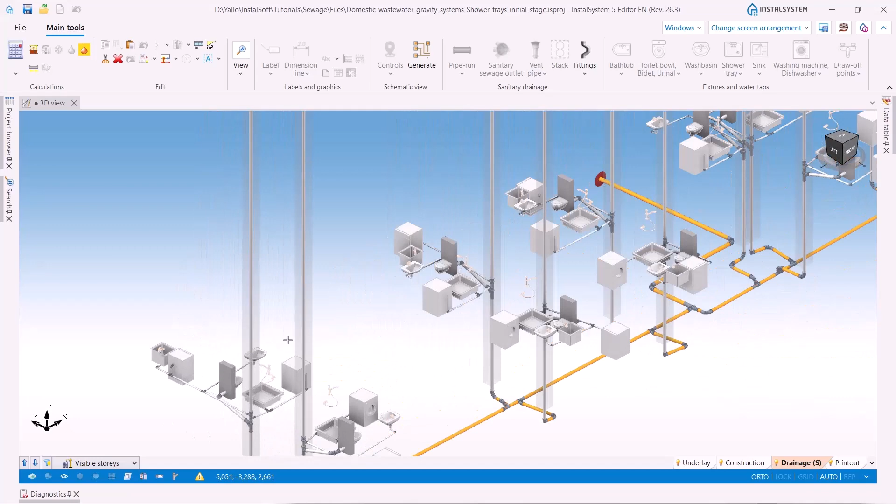And we opened another project. As you can see, it is rather large. I would like you to pay attention to the difference in colors for the network, for the collector, for the stacks, and also for the pipe runs. It can be realized very easily.

Here in the general data, we choose component style, and for the pipe run you can see that we can change the name, the line type, line color, and also the 3D color can be changed easily for all components of the installation.

And we are back to the 3D view. Here I would like to show you how to change fittings for a group of nodes, how to do a one-time type change for multiple nodes. So please pay attention that for such a group of nodes, we have the method of node implementation by default, this one, branch 45.

It is good here, for example, for this place. Here it is. But it is not good for such places. We have several of them in our project. So what we can do is choose them all

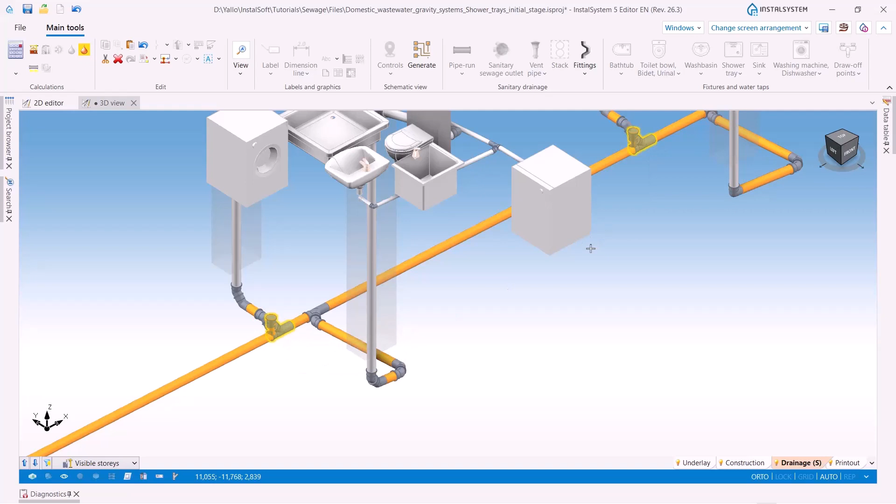with the use of the Control key. We just need to go through all the network, choose the necessary fittings, and here in the data table we will change the type of method of node implementation to this one, branch 87.

And we can run calculations. And you see that the fittings are selected by the program in accordance with the method that we indicated in the data table.

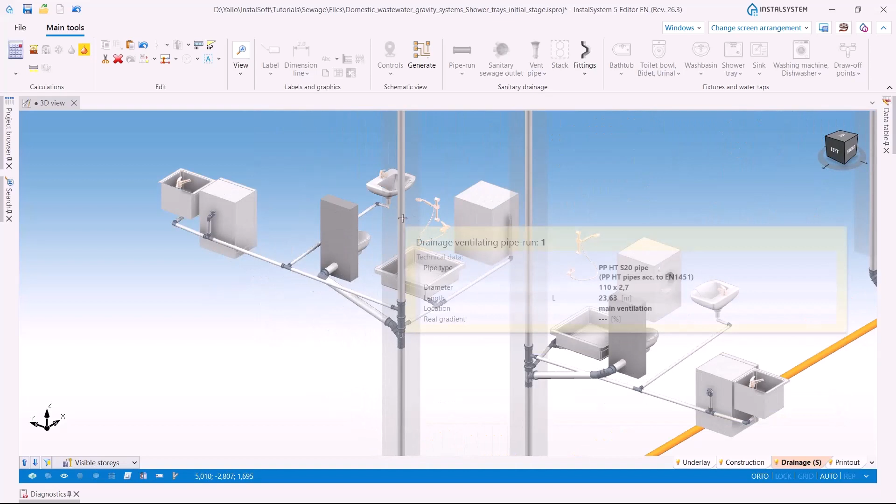The next aspect we will cover in this file is the connection of the fixtures to the riser, especially the connection of shower trays and bathtubs.

And if we have some value here for the floor thickness of the heating floors, this elevation will be taken considering this value also, so the elevation will be even bigger than this data. And we will go back to the 3D view.

Let's calculate the project. And what we can see is the red color of the icon of calculations. Here in the diagnostics window, we see such an error: gradient of pipe run is less or equal 0. This error refers directly to the connections of the shower trays and bathtubs.

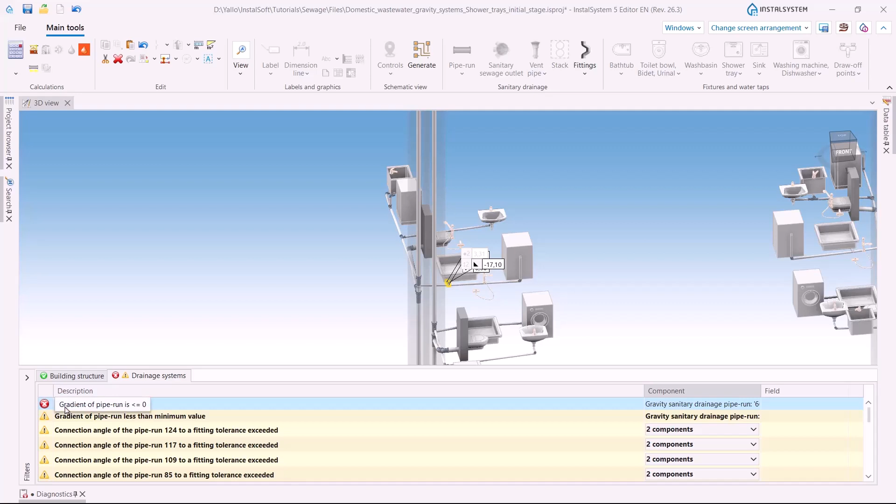This happened because the traps for such fixtures are located under them, so we need to raise them. What should we do for such cases? Here in the project browser, we will find all shower trays, select them all, and here in the data table we will improve this position, distance from the floor, for example to this one, and recalculate the project.

So you can see that the icon is yellow now. That means that we don't have any errors in our project, and the program has calculated the installation.

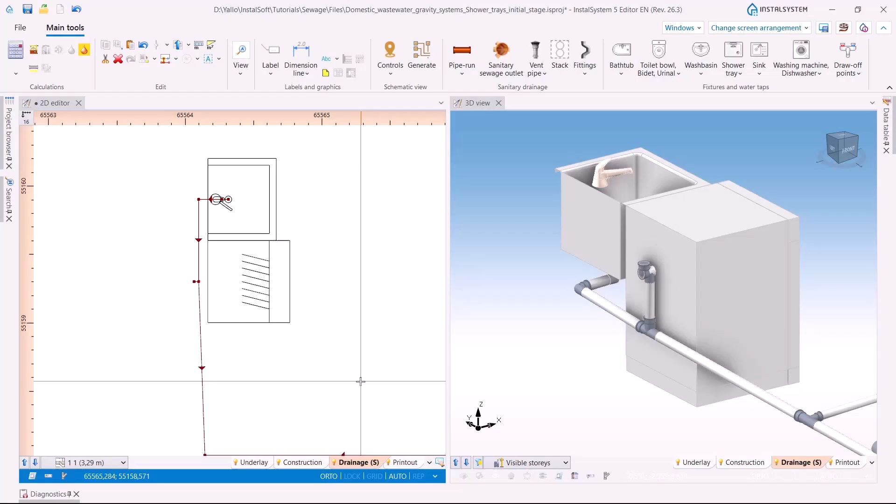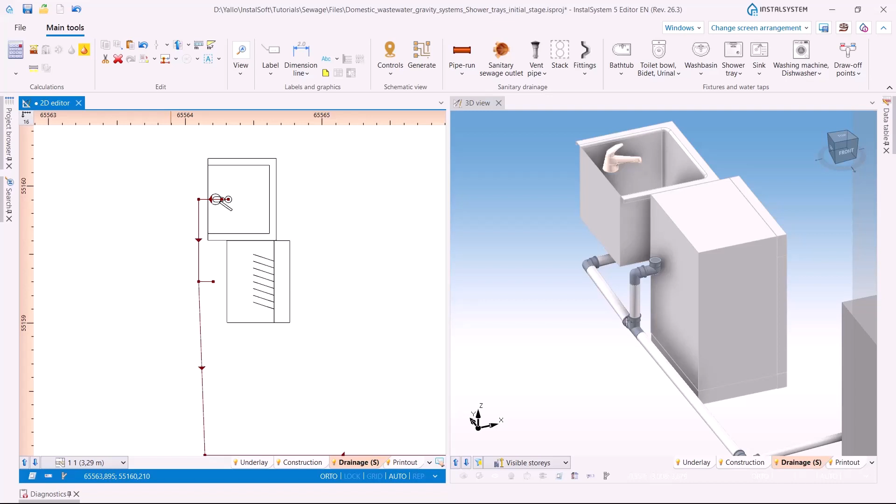Here it is on 2D, and we can just reduce the width of the dishwasher and calculate once again. So you can see that now these fittings look much better, and now this is the correct view of this connection on 3D, and we can move further and use it in our project.

The next important aspect that I would like to show you in this project is the following. Please pay attention that we have many repetitive parts in this project. This project was prepared for you as an example, and I would like to show you this case, the case of connection to the toilet bowls. Please pay attention that here we have two identical mirrored connections, this one and this one, but the solution is different.

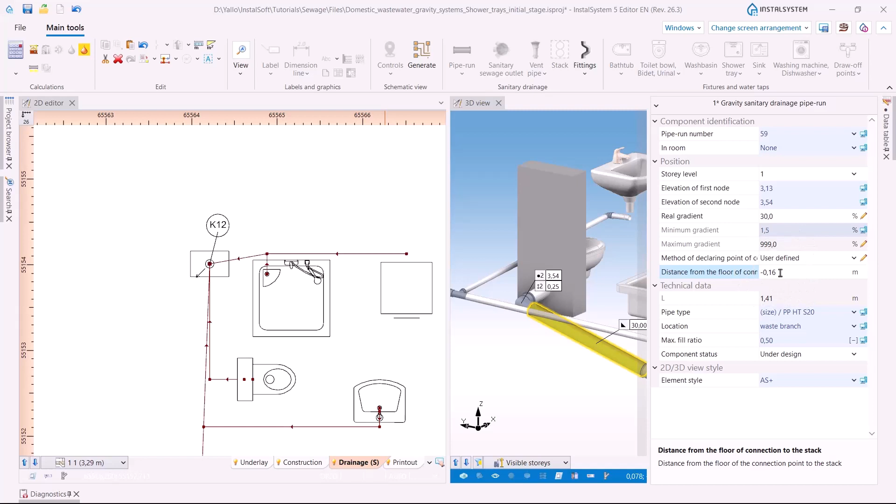That happened because here I used the method that I've previously shown you to improve this connection. I specified the value of maximum gradient as 999. Also I changed the method of declaring the point of connection to the stack to user defined, and I specified the distance from the floor of connection to the stack. Here we have many similar situations, and what you should know is that we do not need to improve each one separately.

For this purpose, we will do the following. Let's first of all remember the properties of the reference connection. Here in the data table we have the length of this pipe run, 1 and 41. We have location, waste branch, and also here in the hint with technical properties we have sum of DU, 2.

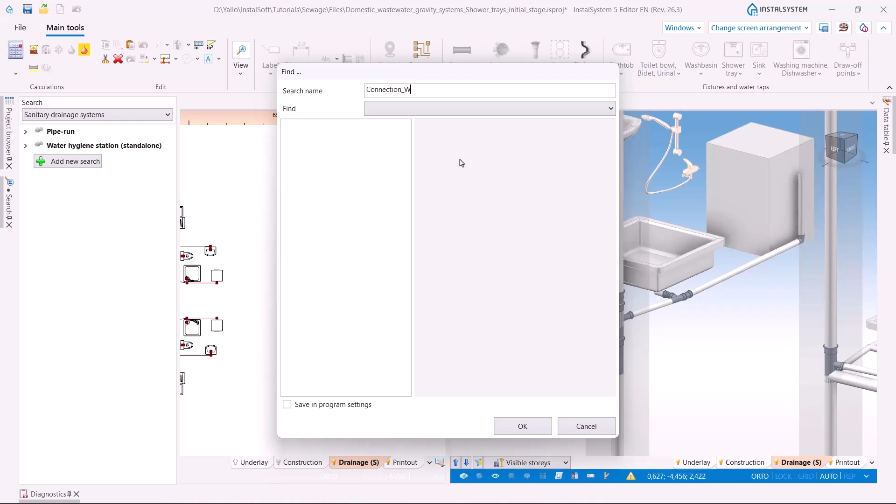Let's go to the search window, and here we will add a new search. Let's call it Connection_WC. We will find pipe run with the length from 1 and 3 to 1 and 5, with the location waste branch, and with sum of DU from 2 to 2.

Let's find all connections, select all. And as you can see, the program has selected all connections to toilet bowls. Here in the data table, I will indicate the method of declaring the point of connection to the stack as user defined. I will set here -0 and 16. Maximum gradient 999, and the value of real gradient will be 30%. Let's calculate the project.

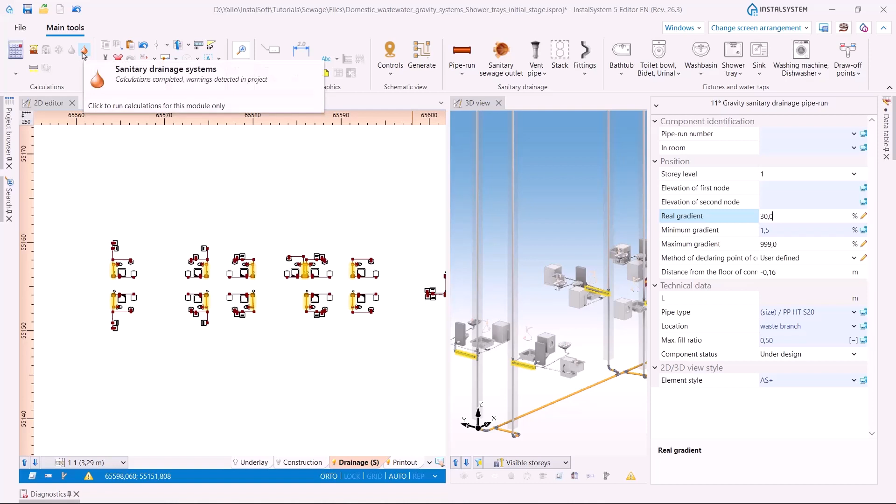Now you can see the results of our manipulations. It's not very attractive here. We just need to improve the real gradient step by step. Maybe it will be 32. Let's see. Yes, everything is okay.

So this is the path of how we can quickly and easily find and modify several elements of the same type. By this opportunity of changing the properties for a group of the same elements, you can save a lot of time and not do it separately for each element.